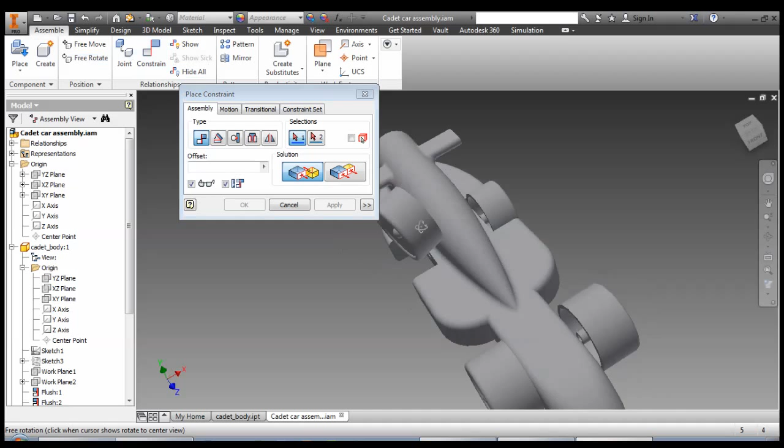Okay, so one wheel left. Just want to show a little trick. If you're having trouble getting it to face the right way when constraining it, you can go free rotate, click on it, and then just spin it roughly into position so it's at least facing the right way. Now when we go to constraints, hopefully it eliminates issues and faces the right way.

Drag it out, see what I'm doing. Constrain one more time. Internal surface there, internal surface there. Offset of 1. All the wheels are in.

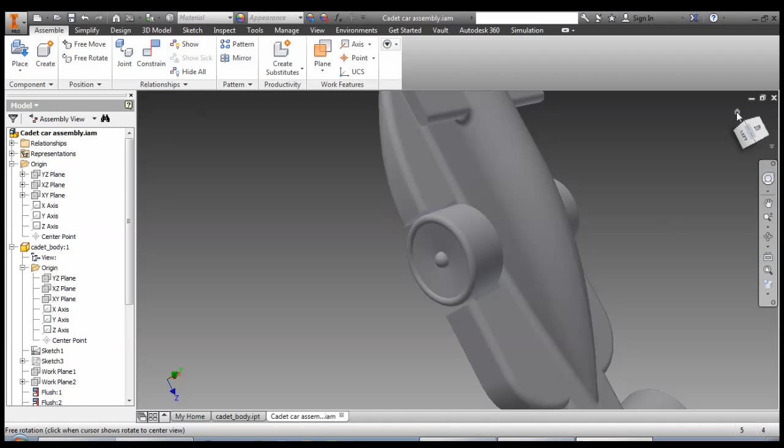Car's looking much better just by having the wheels in. Looks a lot more dynamic. Save.

Okay, next thing we will do is to work on our front wing. We're going to use one of the great tricks of Inventor, which is editing this bodywork in place in this drawing, so we can get the distance between the wheels that we need.

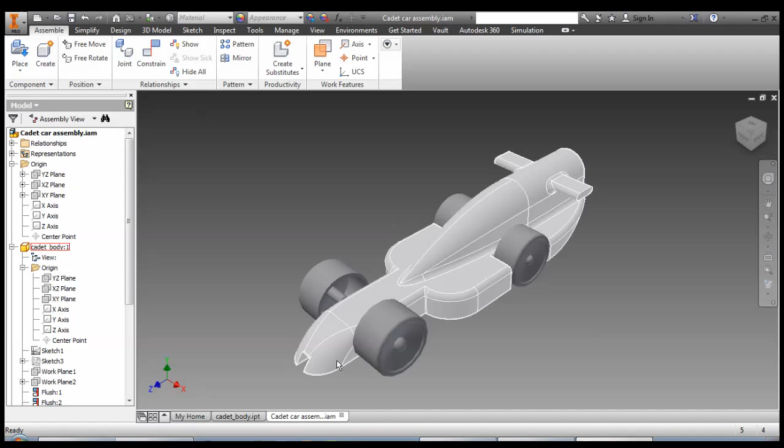So you'll find that if you double click on something to open in another tab, it will switch to that tab. So close that, and our assembly, which is now open by itself.

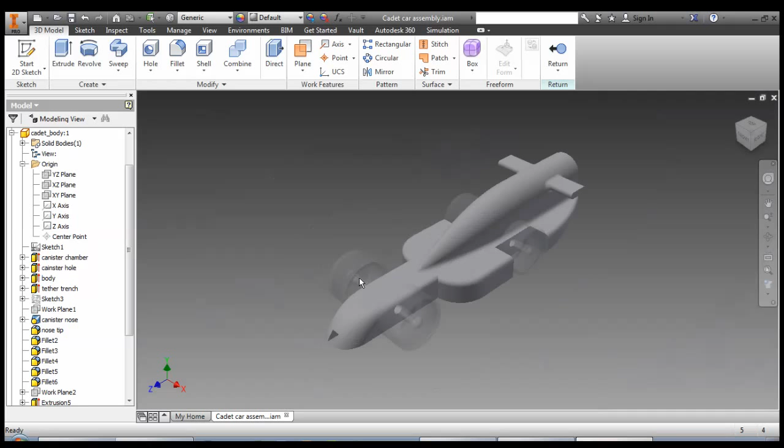Now we should double click on the body. We're editing within the assembly. You notice the wheels have ghosted and gone translucent, and when we finish editing, we simply click return up here. We're not quite ready to do that yet.

We're going to start a sketch, and we're going to do it on that extra plane that we set up. Actually, one more trick before we start the sketch. We're going to drag end of part above the mirror. That way we'll reapply the mirror and the new wing will be added to it as well.

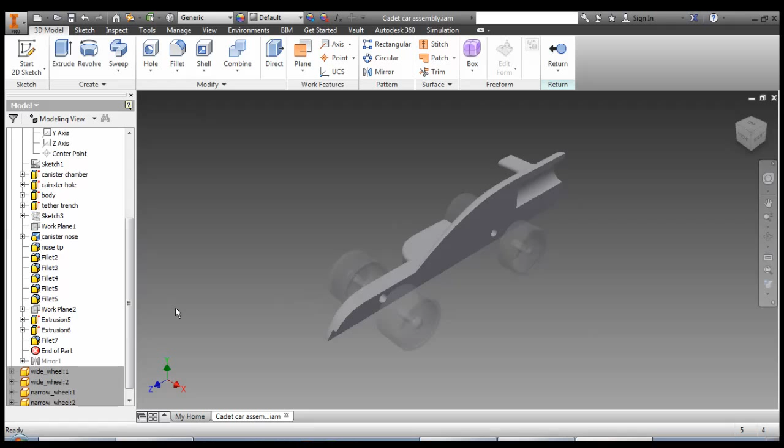So now the sketch, we'll use our work plane 2, and the camera around to be looking from the outside. If your view is a bit funny here, make sure you don't have straight perspective on, because now it's going to distort everything. So you want either ortho, or perspective with ortho faces.

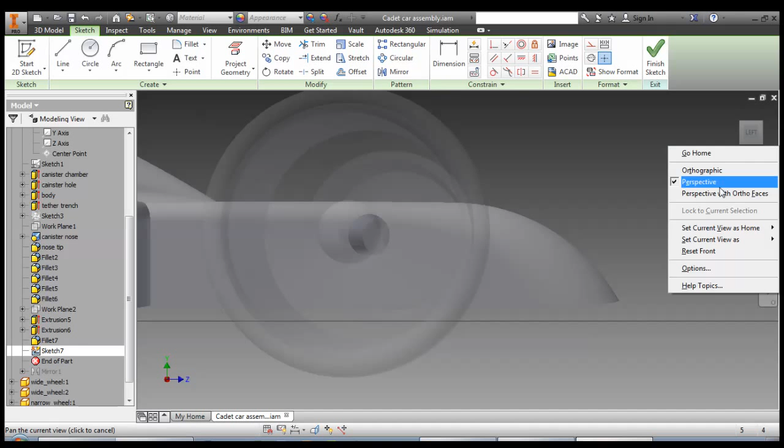Now it's flat. First thing we're going to do is project some geometry. We're going to trace it outside the wheel. And we're also going to draw a line from the bottom of the wheel out. I don't know how far.

We want that to be horizontal. Or for some reason, that's vertical. It's got to be locked at 90 degrees. And we want that to be a construction line.

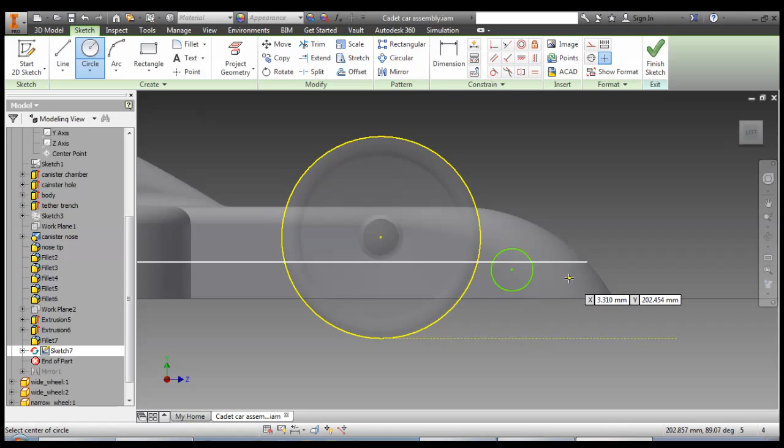Now, so because it's referring to something else from outside the car, we're ready to draw on our front wing. I'm going to go for something slightly different here. I'm going to draw 2 circles and then some lines going between them.

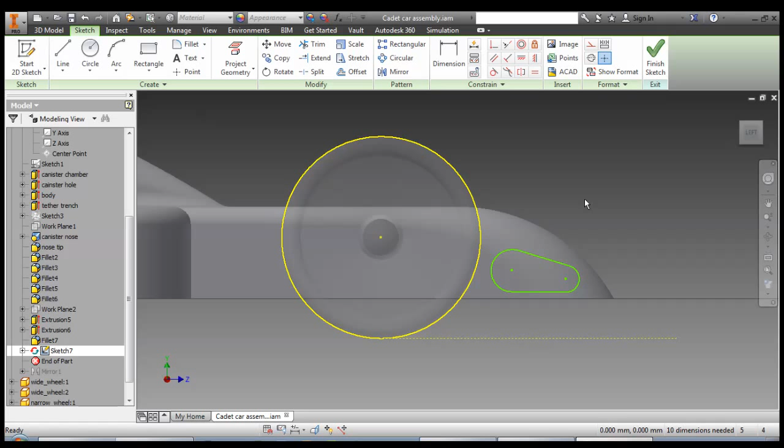And I'm going to trim the insides of them. Okay, so rules that we have to look out for here. We can only obstruct 15 mil from the road surface up.

So if I was to draw a line from the very top of here, coming out and make that a construction line, double check, it'll probably say it already is. That's a tangent with that.

That means I can now drag this up or down, and the top of the circle will never go above that line. We're changing the dimension of this line to be less than 15, so I think 14 is safe. It's going to make sure that we're not breaking that rule, track surface obstruction of 15 mil.

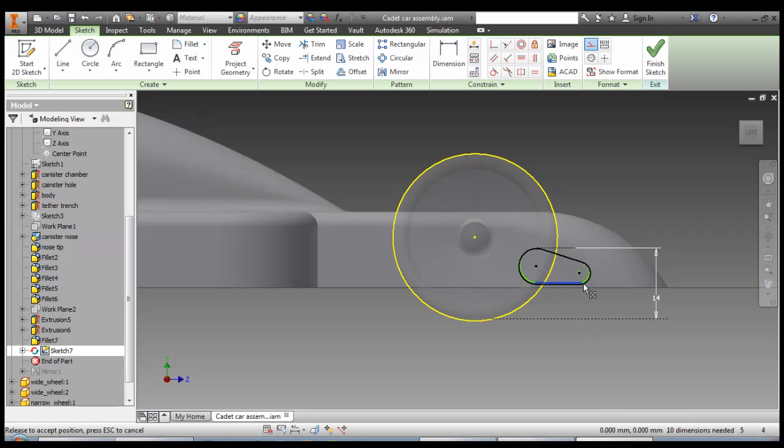Get this back in the right place. Undo if you start getting in trouble with these things. It can be a little bit tricky sometimes to pull things back where you want them. Okay, that's close enough to work with.

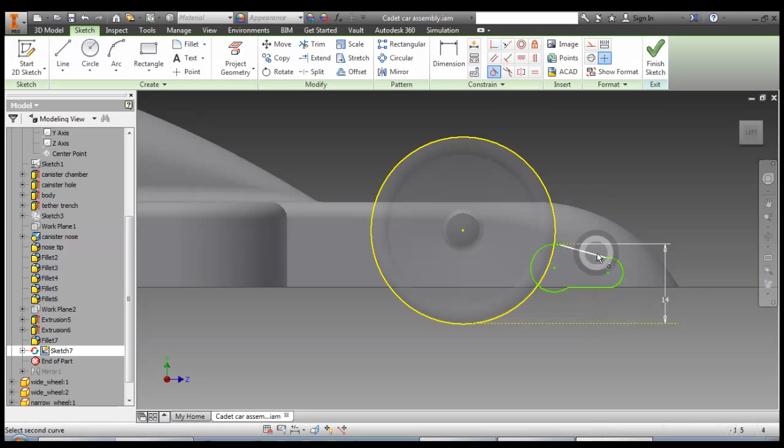So let's make sure some of these are actually joined. Coincident between there and there, coincident between there and there, and now some tangents. There and there, there and there, there and there, and there and there. Oh, that one already exists, that's fine.

Okay, hopefully now we can move this thing into the correct place. There we go. Stay close to what we want. We probably want this one a little bit more here. We can actually lock that in by going collinear between here and the bottom.

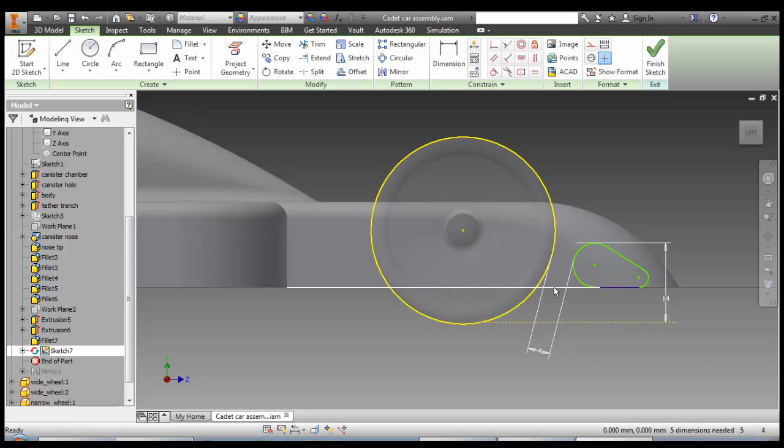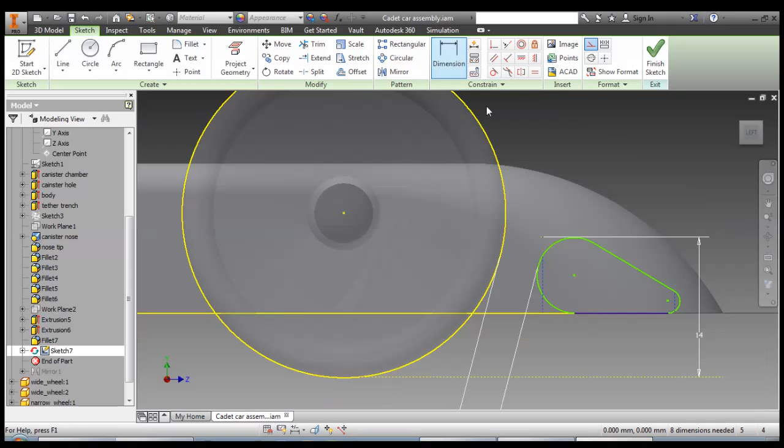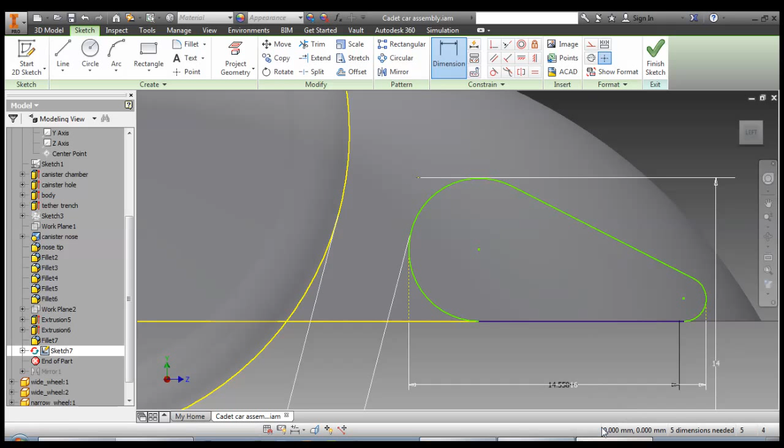Now hopefully we can tell this that we want it to be at least 15. That's like a 16, or perhaps even 17, just to elongate it and make it a little bit smoother through the air.

Okay, our minimum height is half. I don't think we're going to be anywhere near that, so we'll leave that as is, and we're ready to extrude our front wing.

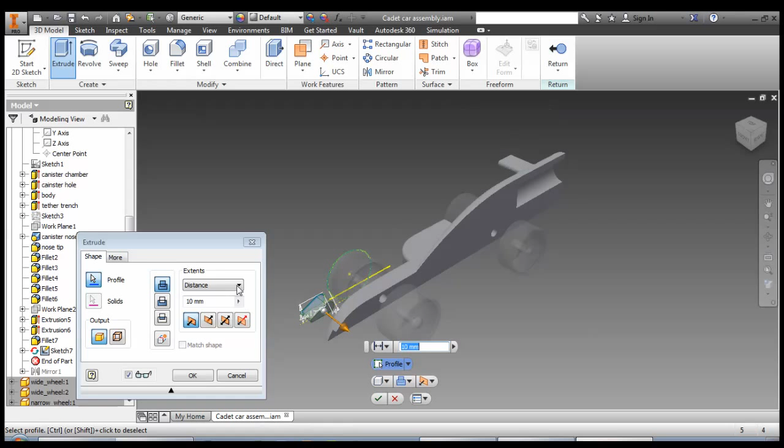As always, so click on the shape, change the distance to To Next, so it keeps going until it hits the nose, follow the nose. Okay.

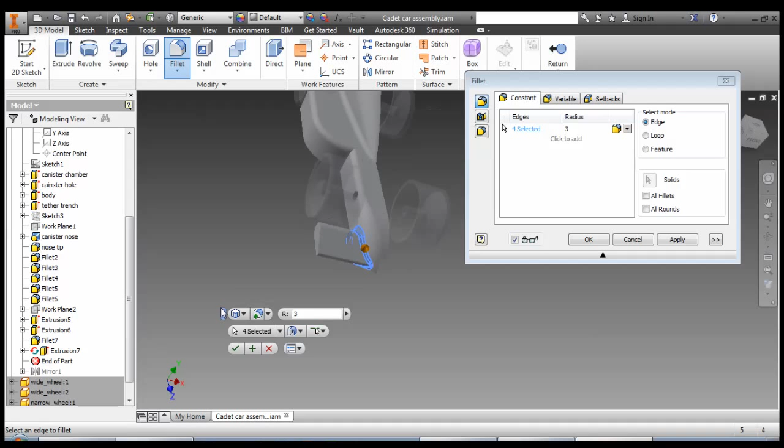Probably going to apply whatever fillet we're going to put on this nose before we remake the mirror. May or may not like this one. 3 millimeters. Seems like it will work. Hit OK.

Okay, that's looking good. So now all we need to do is to drag end of part beneath the mirror. It should do the entire lot now. And if you remember when we made the mirror, we selected it to do the solid body. So if we added geometry, it is connected to the rest of the solid body, and therefore the mirror gets reapplied to it.

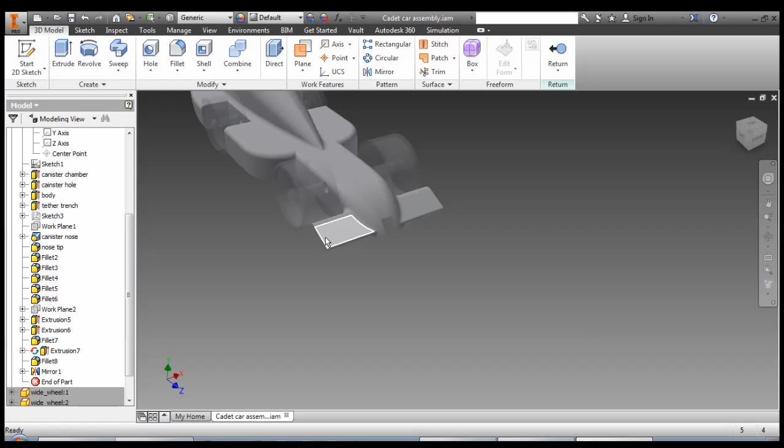We can return to finish editing that part, and our car is looking quite nice. We know it's very close to legal, if not completely legal already. So save your work, and we'll do some final refinements next.